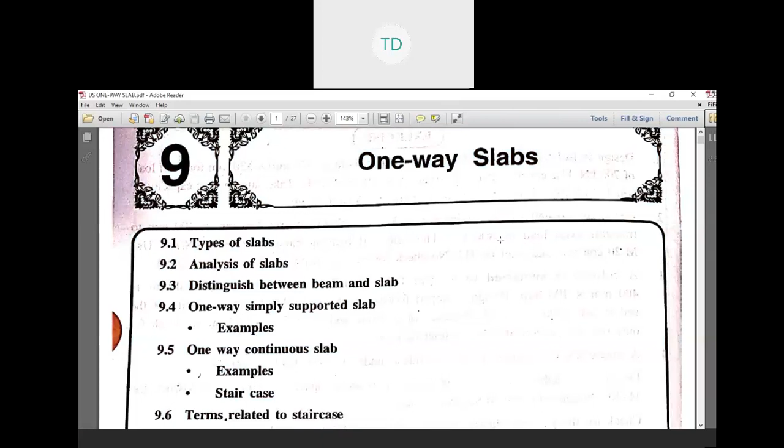Let's see in details the types of slab, analysis of slab, distinguish between beam and slab, one way simply supported slab with an example, one way continuous slab with an example, staircase, and terms related to staircase.

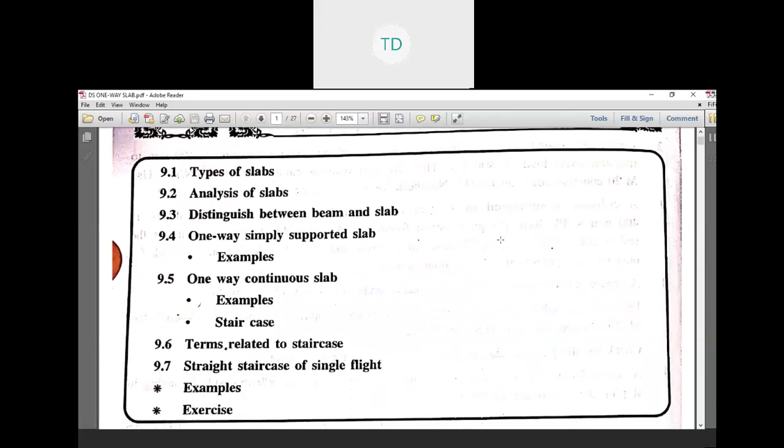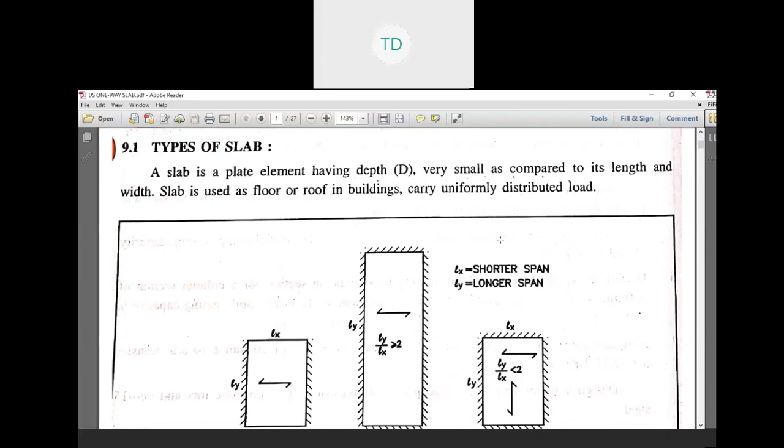Starting with types of slab. A slab is a plate element having depth d very small as compared to its length and width. Slab is used as a floor or roof in buildings, carrying uniformly distributed load.

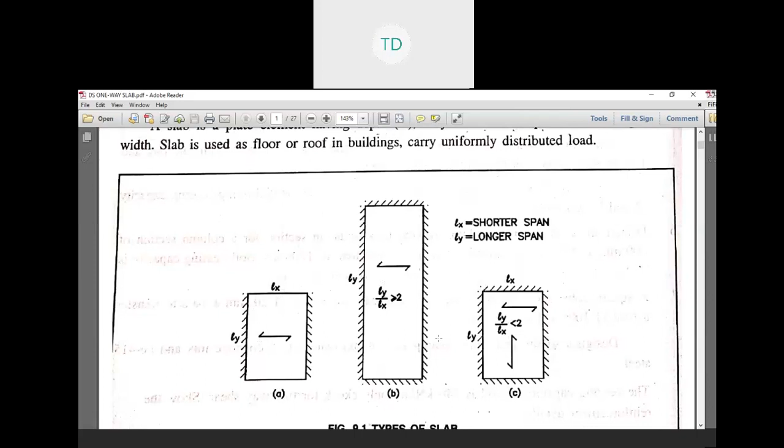This is the simple types of slab. Slab may be simply supported, continuous or cantilever.

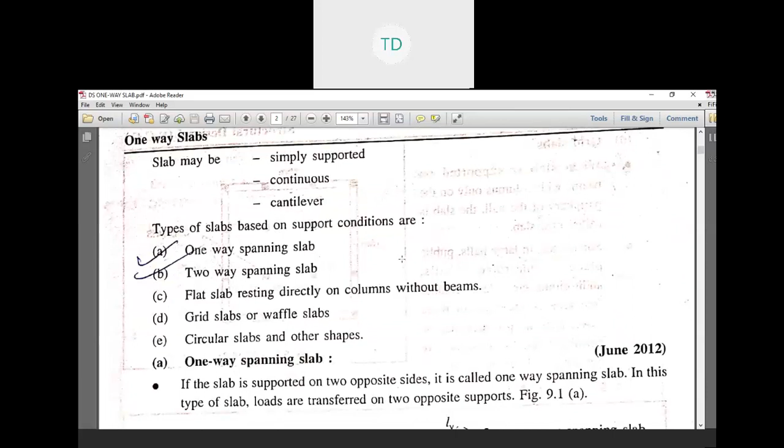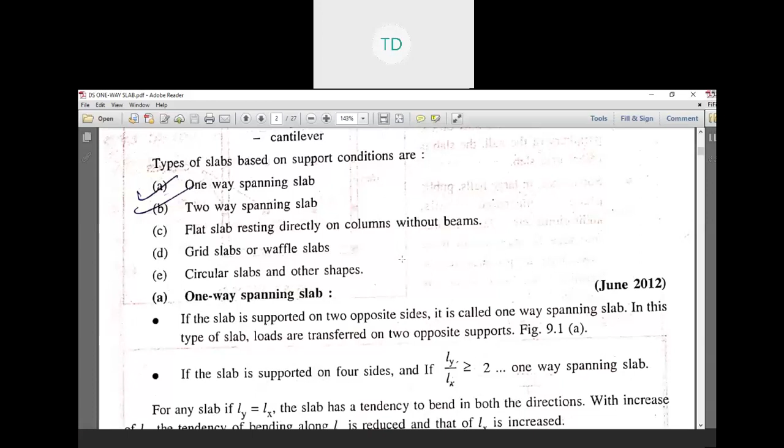Generally, types of slab based on support conditions are: one-way slab, two-way slab, flat slab resting directly on column without beam, grid slab or waffle slab, circular slab and other shape slabs.

First let's see one-way slab.

If the slab is supported on two opposite sides, it is called one-way spanning slab. In this type of slab, loads are transferred on two opposite supports.

If the slab is supported on four sides and if Ly by Lx is greater than or equal to 2, it is called one-way spanning slab.

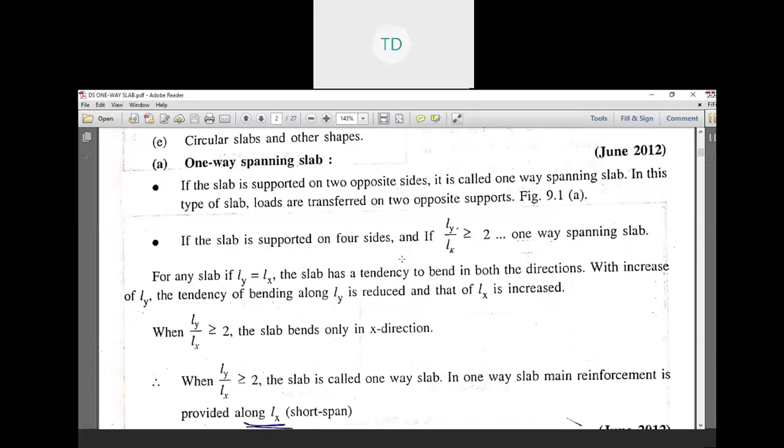For any slab, if Ly is equal to Lx, the slab has a tendency to bend in both directions. With increase of Ly, the tendency of bending along Ly is reduced and that of Lx is increased. When Ly by Lx is greater than or equal to 2, the slab bends only in x direction.

So when Ly by Lx is in this range, we provide main reinforcement along x direction in one way slab.

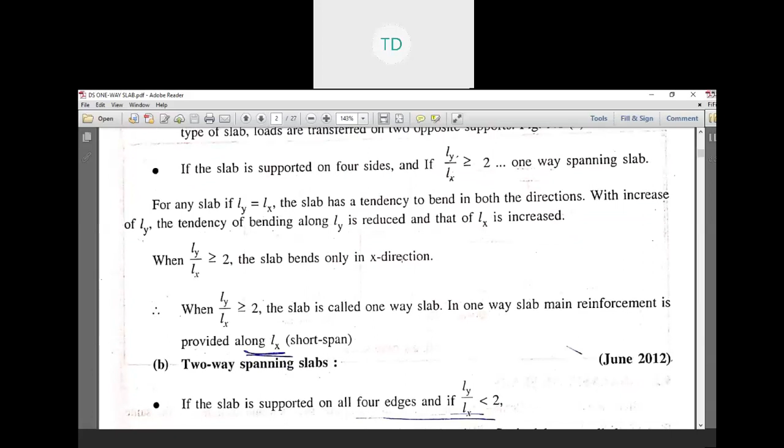Similarly, two way slab. If the slab is supported on all four edges and if Ly by Lx is less than 2, the tendency of the slab is to bend in both directions. Such slabs are called two-way slab. In two-way slab, main reinforcement is provided along Lx as well as Ly direction.

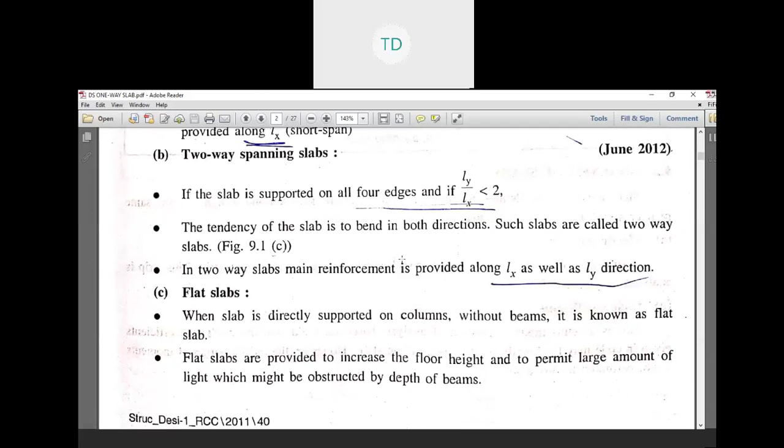Flat slab. In case of flat slab, there are no beams defined. So when slab is directly supported without beam, it is known as flat slab.

Flat slabs are provided to increase the floor height and to permit a large amount of light which might be obstructed by the depth of the beam.

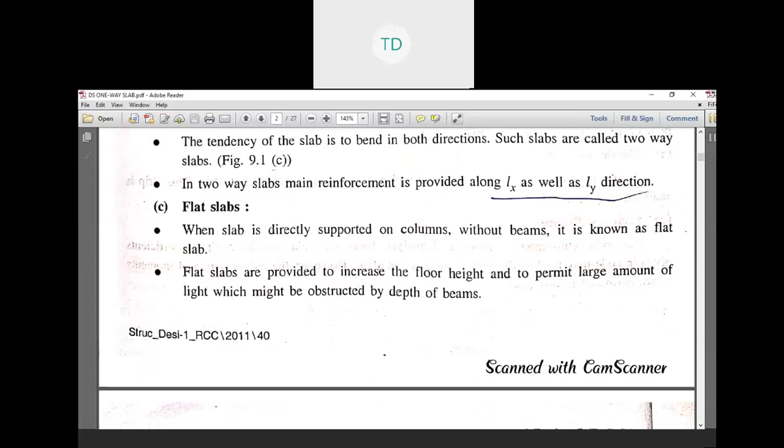Grid slab. When slab is supported on beams with columns only on the periphery of the hall, the slab is called grid slab.

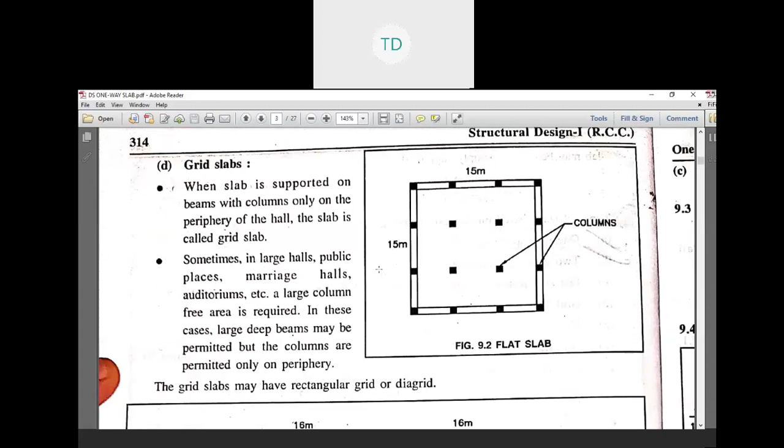Sometimes in large halls, public places, marriage halls, auditoriums, etc., a large column-free area is required. In this case, large deep beams may be permitted, but the columns are permitted only on the periphery.

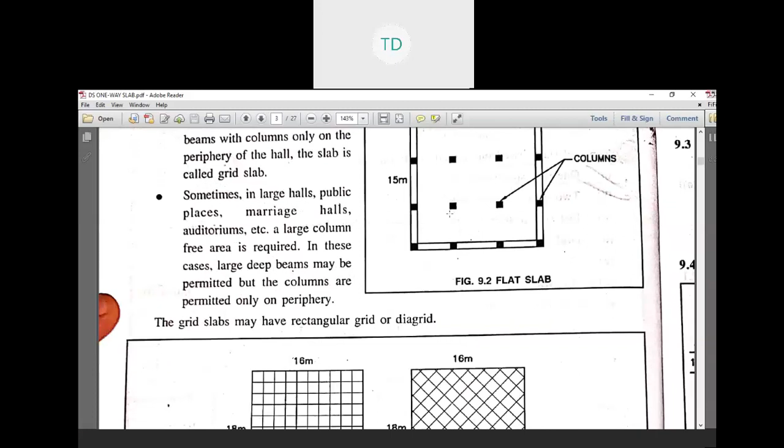The figure shown is flat slab. There are columns, square grid, diagonal grid. Now we are going to study the analysis of slab.

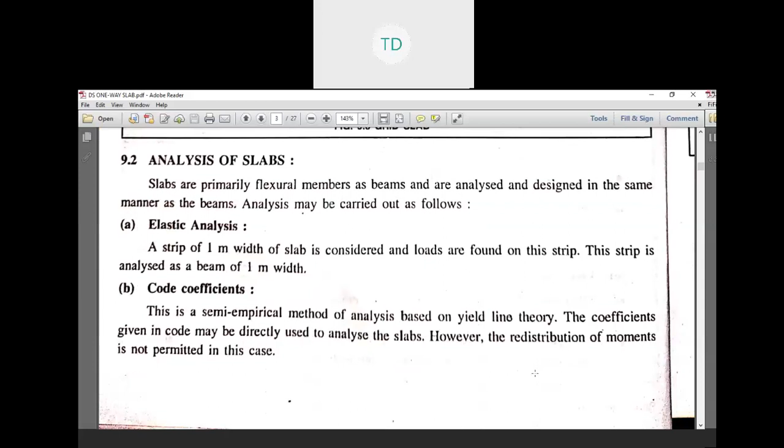Slabs are primarily flexural members like beams and are analyzed and designed in the same manner as beams. Analysis may be carried out as follows: first, elastic analysis. A strip of 1 meter width of slab is considered and loads are found on the strip. This strip is analyzed as a beam of 1 meter width.

Code coefficient: this is a semi-empirical method of analysis based on yield line theory.

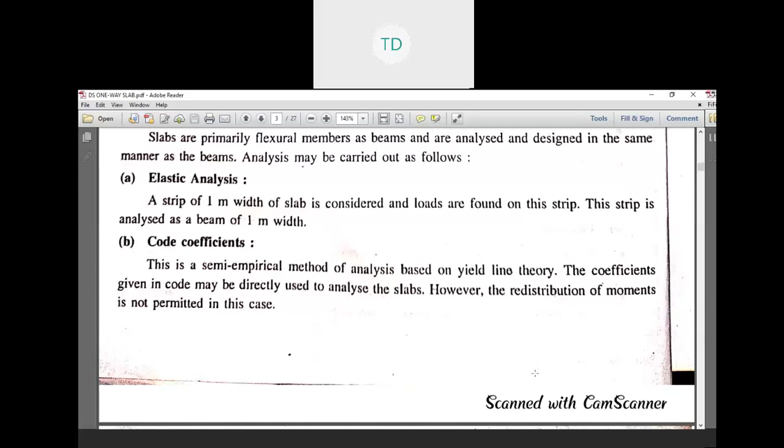This is a limit state design method or collapse load method developed by Johansen.

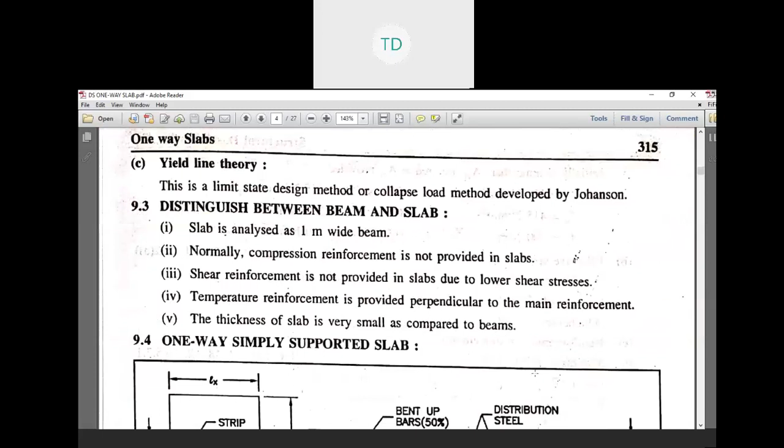We need to distinguish between beam and slab. Slab is analyzed as a 1 meter width beam.

Shear reinforcement is not provided in slab due to lower shear stress, and the strength or depth is not so much that we need to provide shear reinforcement.

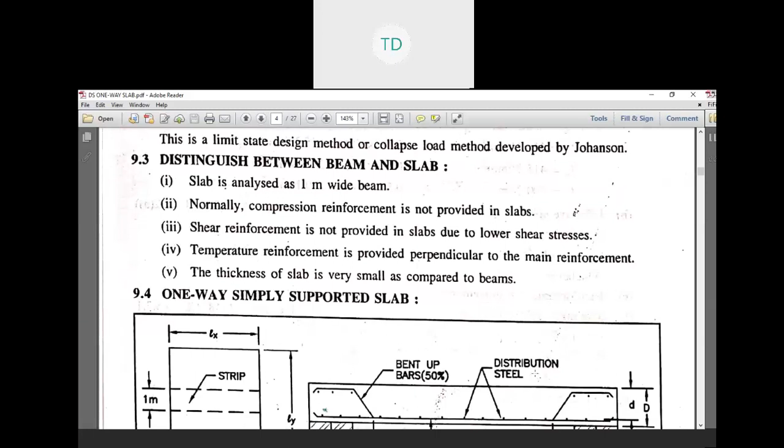Temperature reinforcement is provided perpendicular to the main reinforcement. The thickness of slab is very small as compared to beam.

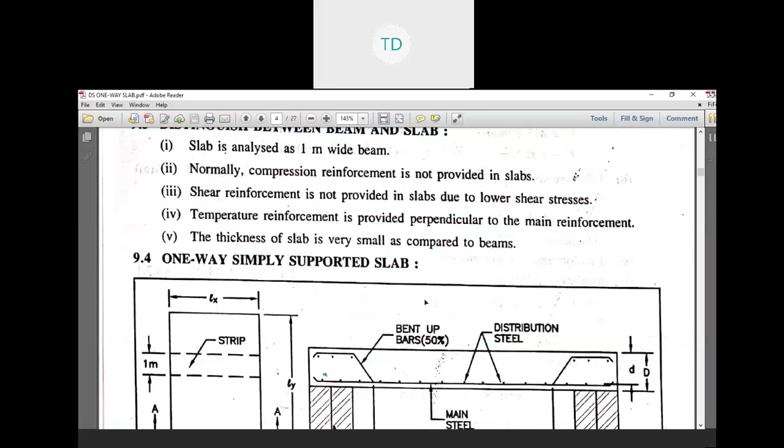Here is the one way simply supported slab. A slab rests on two supports. This is the layout of the slab, showing LY, LX, and cross section AA.

In this we can see the reinforcement: lower side reinforcement as the main reinforcement, alternative reinforcement, and the other curtain reinforcement, distribution steel, and bent up bars which are 50% of the main bar.

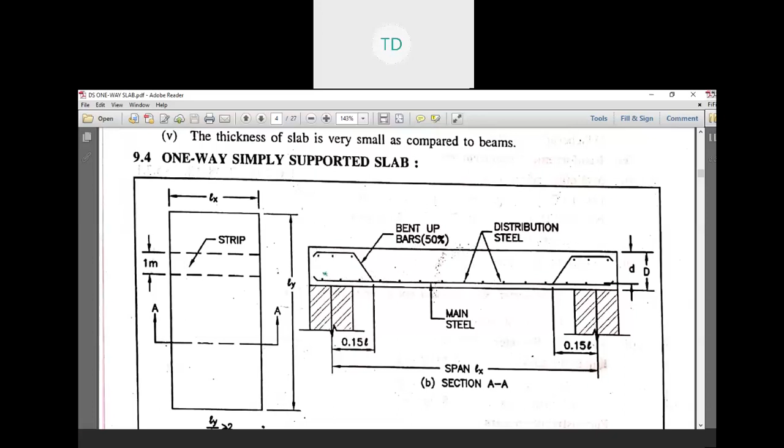Small d, capital D, and the support are shown.

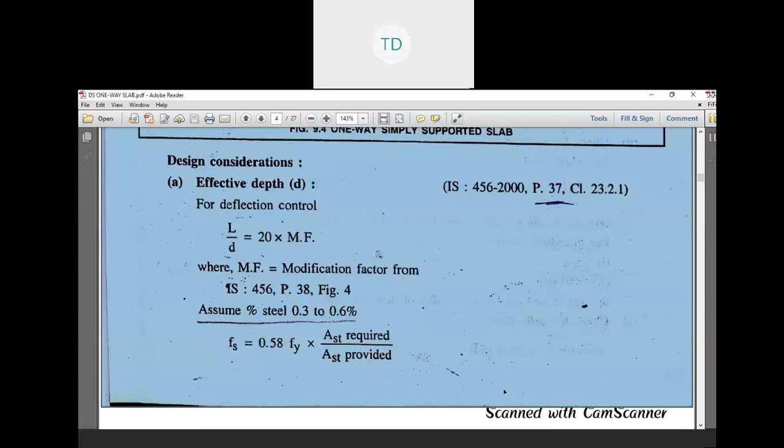Design consideration of slab as per IS 456, page number 37. Effective depth criteria is assumed from L by d is equal to 20 into modification factor.

Modification factor value is taken from IS 456, page number 38, figure number 4.

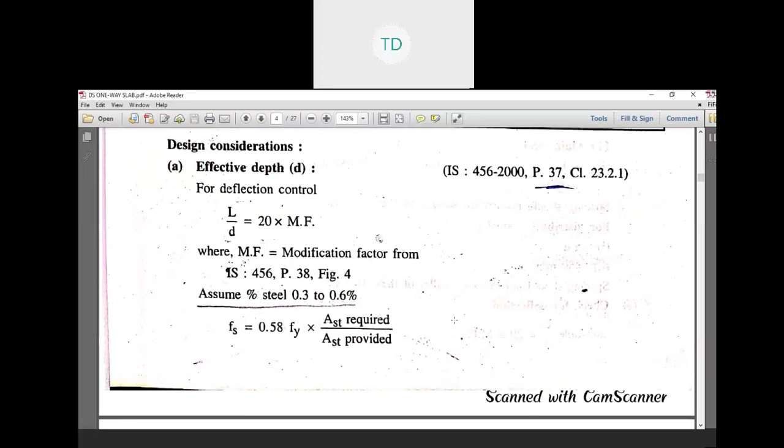Just a minute, I have a call.

L by d is equal to 20 into modification factor, taken from IS 456, page number 38, figure number 4.

Now, as with column design, we assume steel percentage 0.3 to 0.6 of the overall area of steel. Fs is equal to 0.58 Fy into AST required over AST provided.

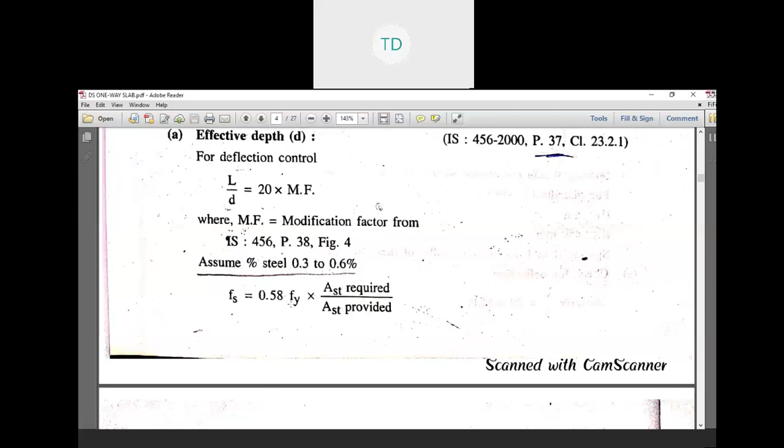This equation will help us take the modification factor from page number 38 of IS 456, figure number 4. How it is taken, we will discuss during the example.

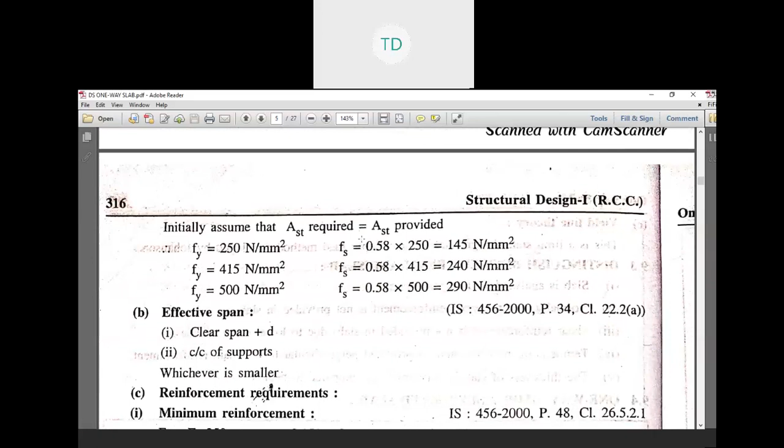Initially, assume that AST required is equal to AST provided. That's why for different types of steel grade there are different equations, like Fy 250, Fy 415, and Fy 500.

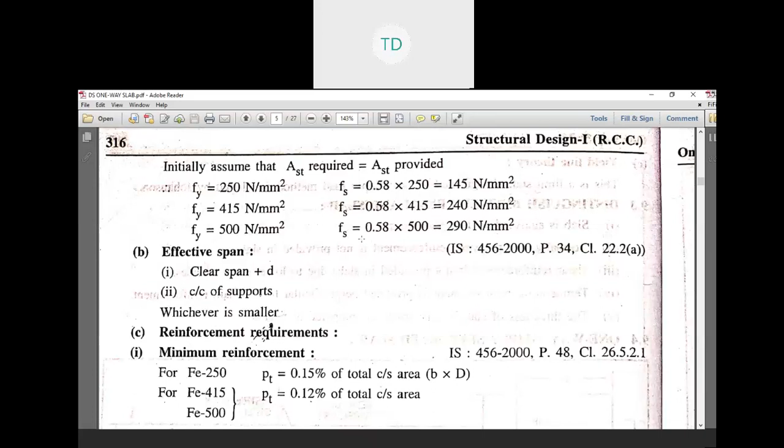There, Fs values are 145, 240, and 290 Newton per mm square respectively. Now, effective span criteria as per IS 456:2000, page number 34, is clear span plus D.

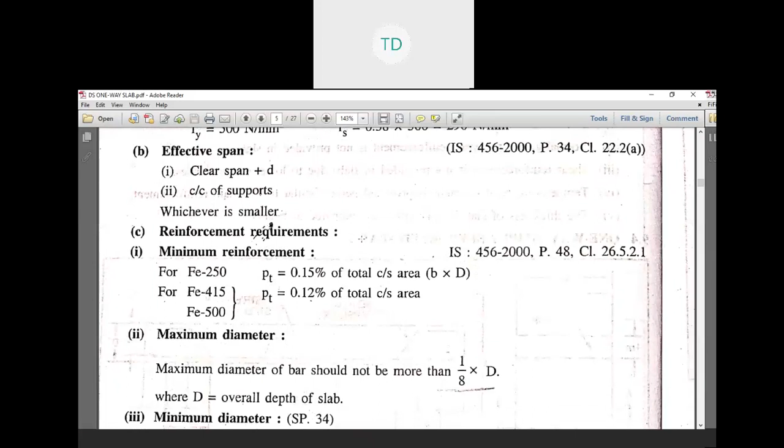And center to center distance between the supports, whichever is smaller. Now reinforcement requirement as per the equations.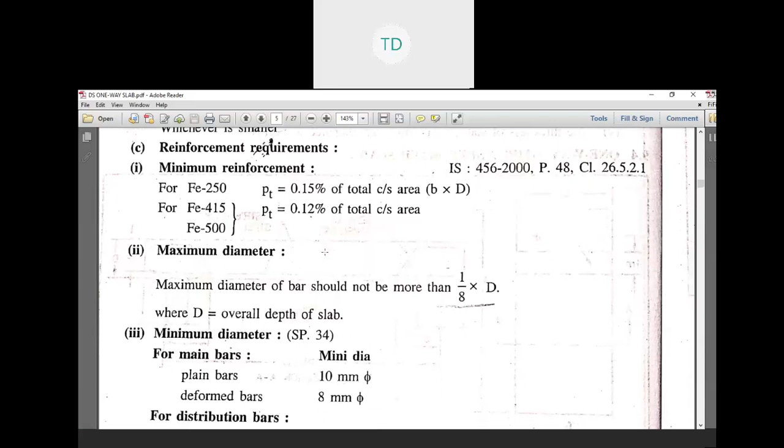Now this is the criteria of minimum steel for Fe 250. PT is assumed as 0.15 percentage of total cross section area, and for 415 and 500 grade of steel, PT is assumed to be 0.12 percentage of cross section area.

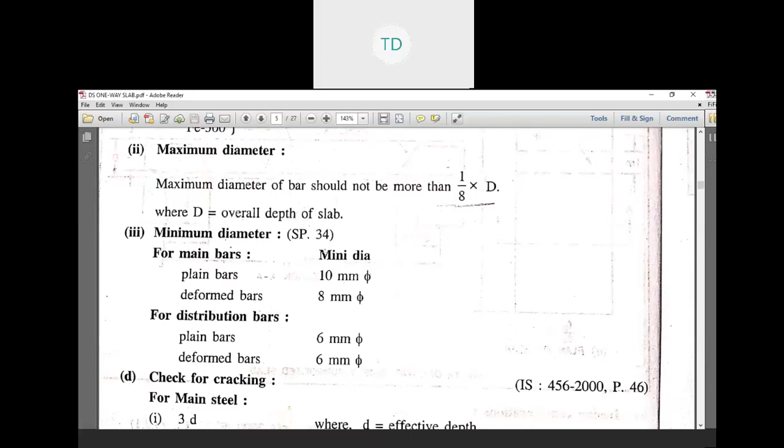Now, the maximum diameter of the bar should not be more than 1 by 8 times the overall depth. That's why D is equal to overall depth of slab.

For minimum diameter, there is a criteria we need to check, first maximum and then minimum. For main bar, minimum diameter is 10 mm for plain bars and 8 mm for deformed bars.